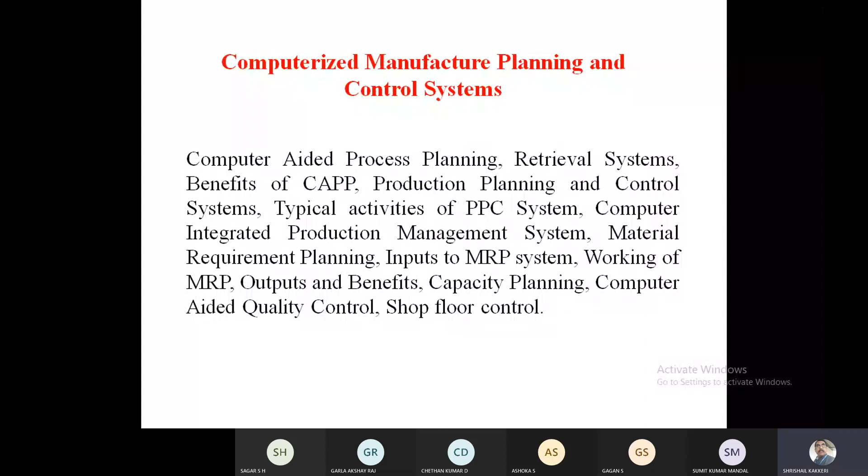So due to this, some of the industries are not able to give their output in a scheduled amount of time. So due to this, we are going to incline towards the computer method of planning. In the computer method of planning, a lesser amount of effort of a planning engineer is needed, and it will be a standard method, and universally anyone can use it, because a standard software will be used.

And now let us come to the manual method. In the manual method, the planning engineer has to interpret the design drawing. First, they have to analyze the drawing, what kind of material will be used, what are the dimensions, what is the tolerance they have to give, and what is the surface finish required. All these I had discussed in the previous class. The choice of process and sequence. So which process has to be used, and sequence is which operation has to be done first.

For example, I have to go for the threading on a mild steel rod. Then first they have to do the plain turning. After that, we can go for the threading operation. The plain turning operation is the first prerequisite, and next the threading operation. These are the two sequences I told. Or simply, the plain turning has already been done, and I want to go for the threading operation.

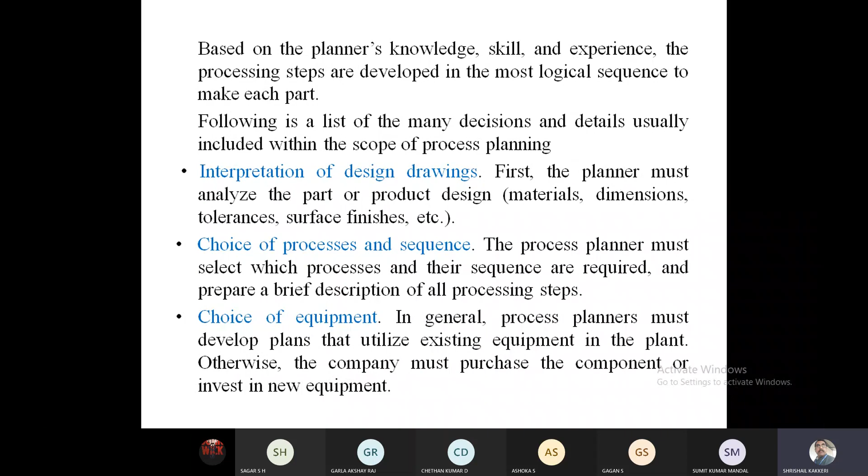The choice of equipment: what kind of equipment has to be used, and whether this equipment is available in the organization. If it is not available, you have to analyze how many products we need to do yearly, monthly, and weekly, and how many products we are repeatedly doing for the entire year. Based on that, we can take the decision whether we have to invest in the machinery or give it to vendors outside. Okay, this is the choice of the equipment, and then the choice of tools, dies, molds, fixtures, and gauges.

And this is a very, very important stage. Sometimes we need to hold the material, we need to hold the tools for a specific operation, and what kind of dies and tools are needed. If we are talking about sheet metal operations, there we need to incline more towards die operations. So whether these dies are available or not, and if they are not available, whether we are able to fabricate them within our shop or give them outside to a tool room to get this work done. The dies, molds, fixtures, gauges, all these the planner has to think about. And method, the analysis method.

Okay, the analysis method is the workplace layout. What is the available workplace layout, how many small tools are available, and whether any hoists and lifts are available to lift the heavy parts.

Okay, and if it is the assembly, how it is to be done, in what fashion the main part is to be located, and how the sub part is to be located around the person who is going for the assembly operation. All these he has to sequentially give in the process route, which includes all these analysis methods also.

And setting up work standards. The setting of work standards is one. See, the measuring technique required for the different materials will be different. For example, I want to make a leak-proof container. How can the testing be done? We are going to test the leakage by filling air inside it.

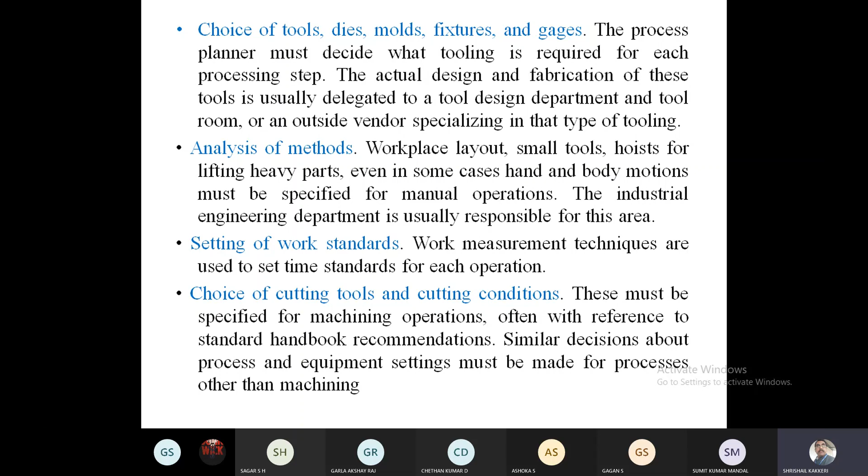So due to this, what happens? If different organizations do the planning of the same material or the same process, the process planning will be different, because it is totally dependent on the process planner's expertise and experience. So we need to go for computer aided process planning, CAPP.

What is CAPP? CAPP is computer aided process planning. Here the skill of the planner is not important. We are going to use standard methods by application of computers, using programs which are already stored in the computer.

And another problem: the shop floor people who are working need not be trained once again. For example, I have prepared a process sheet in which a particular operation is to be done by a person, and the person has retired or has not come. Then how to plan and assign this particular work to others is also very important. Otherwise the whole process will be stopped. So all these internal problems can be avoided by having computer aided process planning.

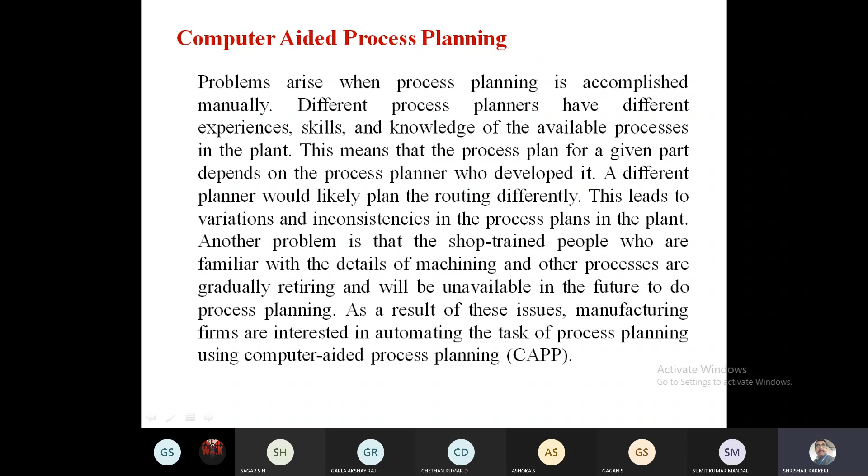Before I go to computer aided process planning, let us see the benefits of computer aided process planning: process rationalization and standardization. As I told you, it is automated process planning, and it leads to a more logical and consistent process plan, which the manual process cannot give. Since it is standard, it leads to lower manufacturing cost, lesser lead time, and very good product quality.

These are the benefits. Lesser manufacturing cost: the cost of the material will be reduced, because the process we have prepared is an optimal one. Second, the manufacturing lead time, MLT, will be reduced, because the materials, including parts already completed, stay in the shop floor until the whole lot is completed. Otherwise we cannot plan to give it to the customers; it is not possible to give to the customer unless I complete it.

So till then, all the unfinished material, finished material and raw material will be waiting in the workshop. That leads to manufacturing lead time. Here the manufacturing lead time will be reduced, and the cost of the process will be reduced. So the cost of the material will be reduced.

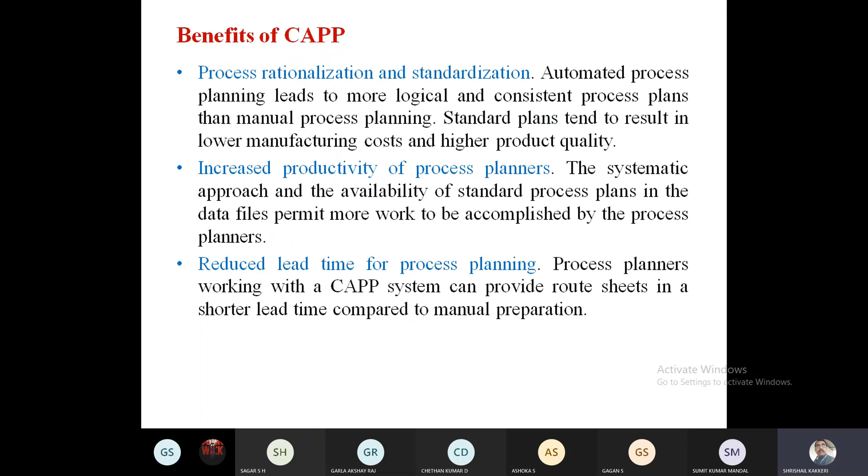Okay, reduce lead time for the process planning. As I told you, I'm not talking about the manufacturing lead time. To prepare the process planning sheet, it will take a couple of hours or a couple of days by the manual method, and since it is prepared by the computer, it will be standard, and the amount of time taken will be very less, so that there will be reduction in the process planning time. And improved legibility.

With computer-prepared routes, the sheets will be standardized, and once we talk about computer software for manufacturing and processing, it will be a global system. Globally the same standards will be used, so that a process planner reading this sheet will find it very easy. Anyone can read these sheets since they are standardized. It is not specifically the planner's decision. It is a computer aided decision.

Okay, incorporation of other application programs. So here, along with computer aided process planning, there is a facility and the possibility to interface other application software. Maybe for cost estimation, or we may have work standards, or I want to transfer the drawing from some standard modeling software to this CAPP. The standard bill of material, all these possibilities are there in order to interface with the CAPP. Okay, it is incorporation of other application programs. And this computer aided process planning,

Am I audible to you? Am I audible? Yes, sir. Yes, sir. Okay. Yes, sir. Varun has come.

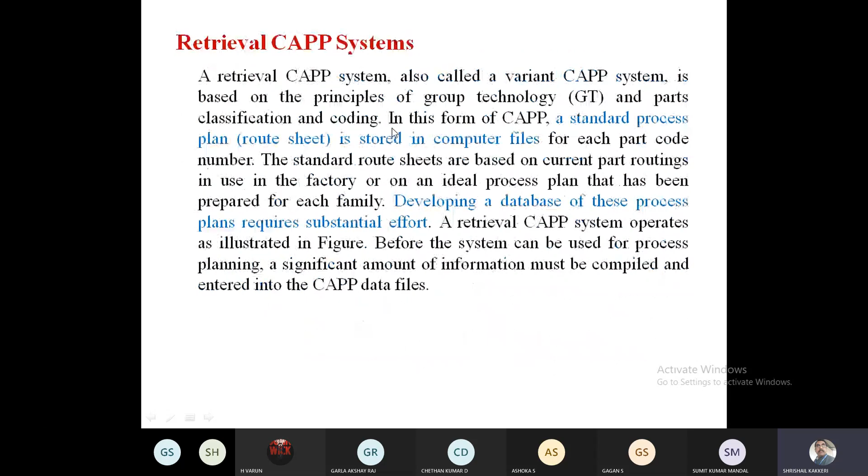Here the same thing I have given. What are the important things? First step, the process planner has to classify and code the schemes for a company. It may be a turning operation. We receive so many orders; a particular order may require many subcomponents, and each subcomponent may have different operations. For coding, for example, a 20 mm rod to be plain turned and a 40 mm rod to be plain turned come under one group. Threading comes under another group, and heat treatment goes into another group.

Like that, we go for the GT, group technology, and prepare the code sheet. After preparing this, you go for the part families, how many families we can make. These part families will be produced in the company itself based on the available database, and based on this we prepare the standard process plan. After doing the standard process planning, we have to search for this standard process plan, and the information included will be code scheme and part families.

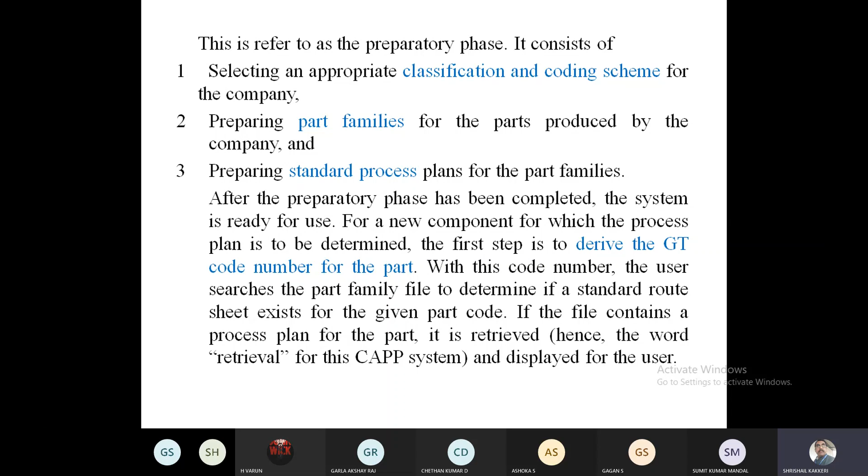That means some standard process sheets are already available in the database. A familiar standard process sheet will be selected by the planner, and if any small editing is required, he does the editing, and again it will be used as a process sheet. Since we are retrieving information available in the database, this is called retrieval CAPP. Any problem, please ask me here. This is very important, retrieval CAPP, and this is what the planner is going to do.

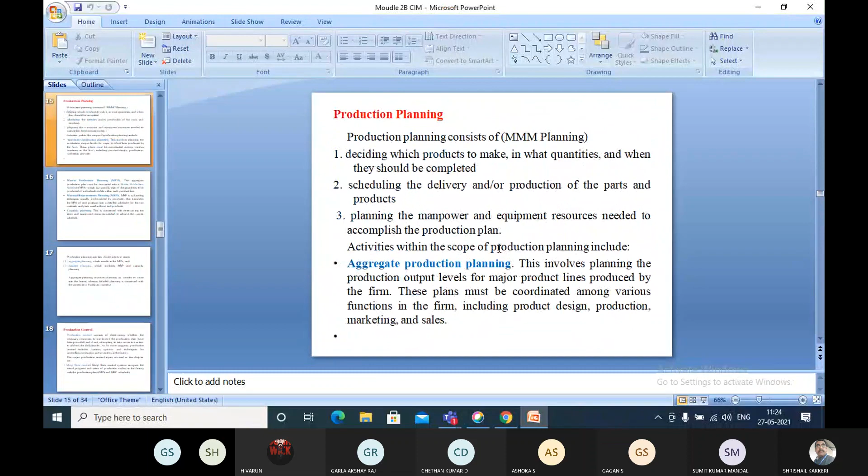Okay. This is what the planner is going to do. Okay, very simple words I'll say. They are going to make a coding for the different operations. Based on the different operations, different processes, the GT coding and part families will be made. And these part families are compared with the standard process sheet.

And once after comparing, for example, within available 100 process sheets in our GT coded plans, one sheet very much resembles this. So that will be retrieved, a small editing will be done, and that will be taken for the process planning. And this is called a process planning sheet, or simply we can say it is a route sheet.

Gagan, Mandal, understood? Yes, sir. Yeah, remember, sir.

Yeah, he is going to interface with this software, and this is the job of the planner. As soon as he receives the order, he is going to study the individual parts, and he is going to label the individual part families. Then after that, by using GT, he is going to make similar kinds of families. These similar families will be coded with different code numbers, and those will be taken for the next process.